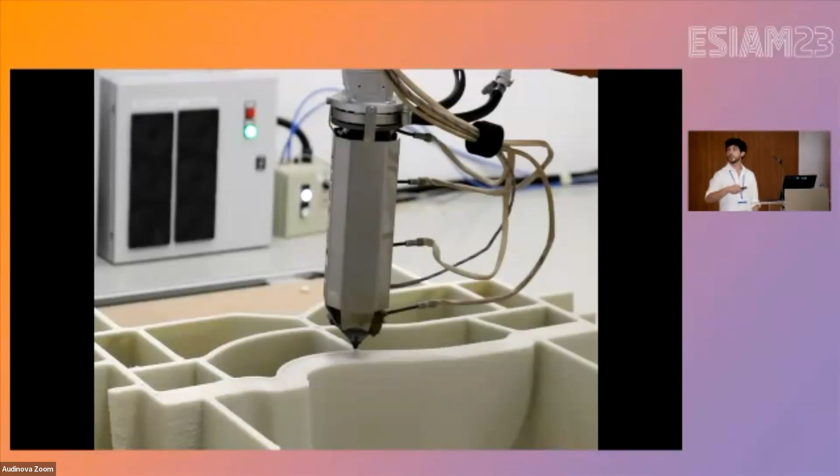What is FGF? This is a bit slow, but we have basically a robotic arm with an extruder, single screw extruder, as an effector. Doesn't start. Anyways, the movement is given by the 6-axis arm. Then the single screw extruder is able of processing polymers, so thermoplastics and thermoplastic composites, so polymer matrix with glass fiber or carbon fiber inside.

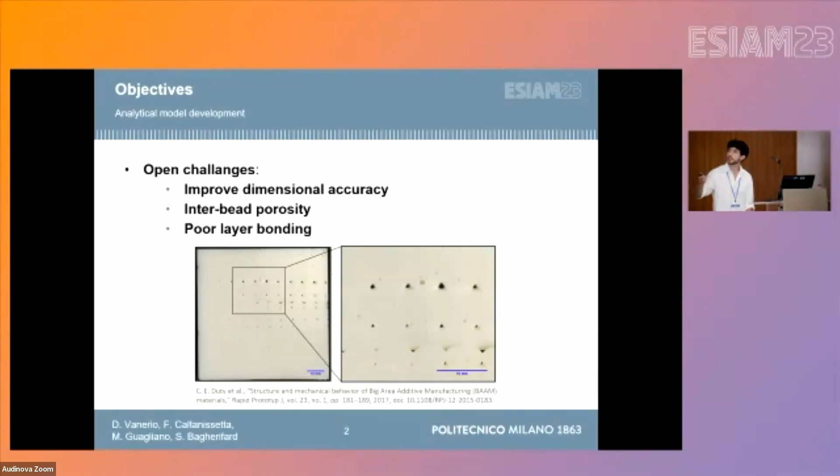The objective of this study is to face some of the open challenges for this technology, which are the improvement of the dimensional accuracy and, even more important, the reduction of the interbead porosity and the increase in layer bonding, so avoid poor layer bonding. In the image, you see some typical interlayer porosity.

So one of the main causes of all of these issues is the imprecise prediction of the bead width. Hence, the aim of this study is to develop a model which is able to precisely predict the width of the single bead. Here below you see a small animation. So at first we have the 2 beads with a gap inside. This would create interbead porosity.

If we make them closer, also the animation has some problems. So if we make them closer, we first have an optimal condition in which they are superimposed with no excess material. And then if they get too close, we have some excess material, which translates into poor quality of the printing and even failure, or in some cases, other type of interbead porosity.

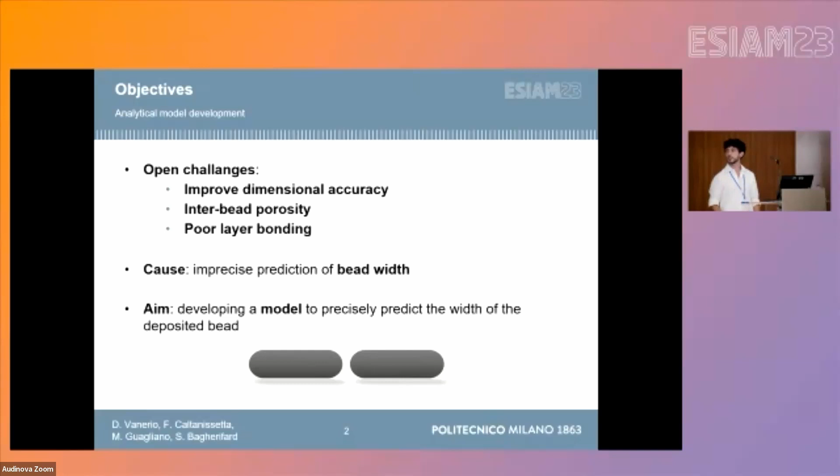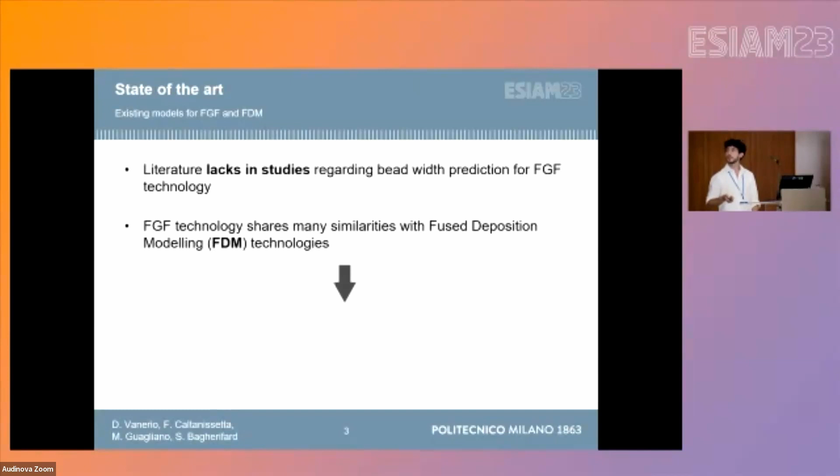So we started from the state of the art. We noticed that there's a lack in studies regarding the bead width prediction for FGF technology. While there are some studies regarding this topic in FDM, and FDM shares many similarities, many characteristics with FGF. So we asked ourselves, could FDM models be adapted to FGF?

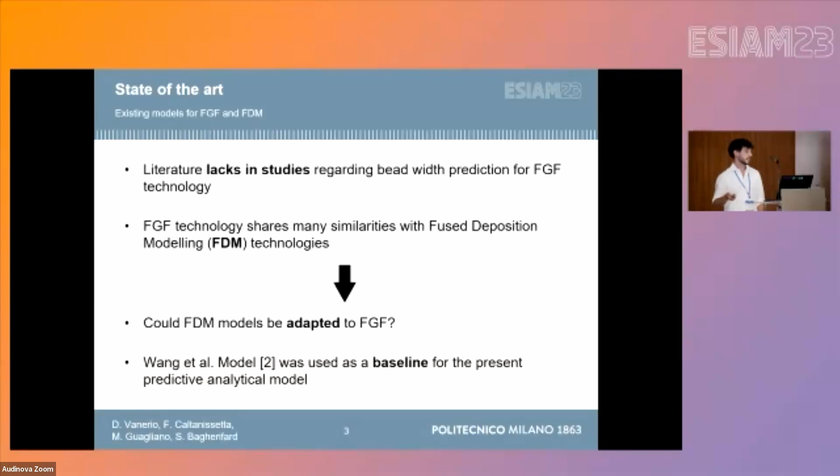And we selected Wang et al. model, which was then used as a baseline for the development of the model presented in the slides. We can start with the parameter definition. So we have this simple geometrical formula for the width. The geometry is basically a rectangle with 2 semicircles at the extremities. In the formula, you see the bead width, the layer height, and the bead cross section.

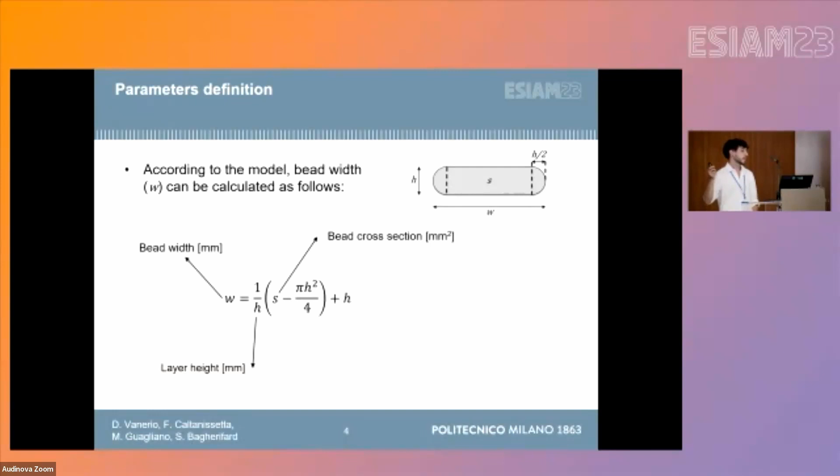The bead cross-section can be calculated as the ratio between the volumetric throughput and the traverse speed, in this case, of the robot. It can be also calculated as the product of the width for the height for a correction factor, which is a factor which corrects according to the semicircular shape at the extremities.

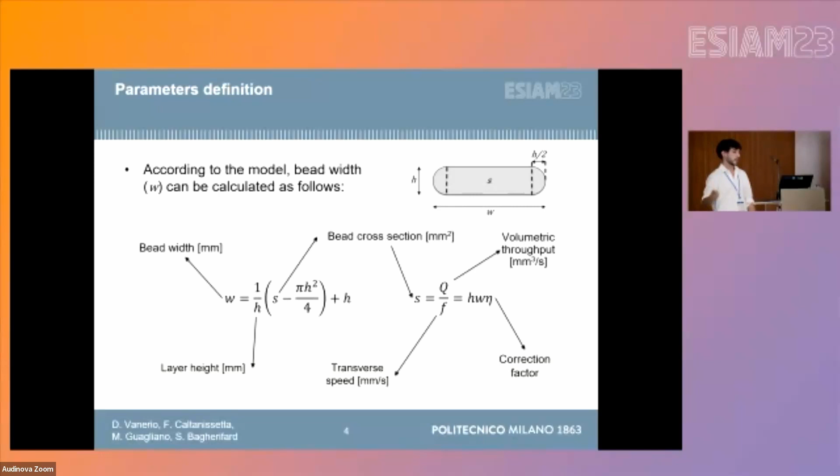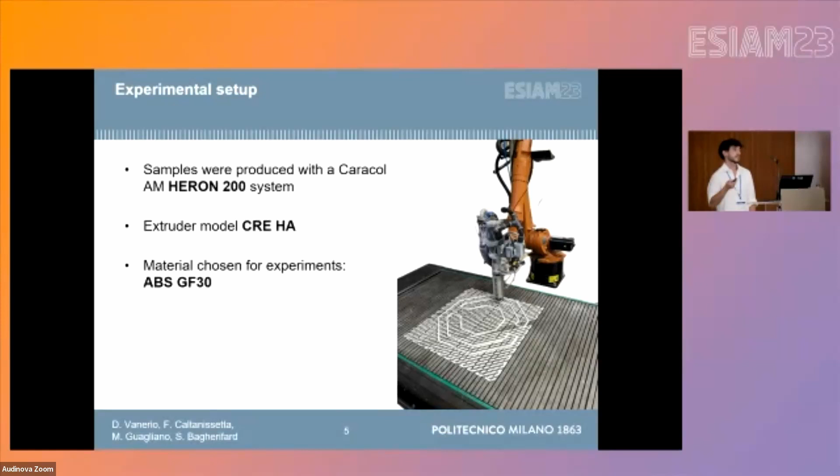From this, we pass to the experimental setup. The setup is, as I said, a robotic arm with an extruder at the end. We chose as a material for the experiment ABS with 30% glass fiber, because it is a commodity material we use very often for many applications.

This is the design of experiments. We started by investigating the throughput and regulating the throughput. We analyzed 10 different levels. For each level, we have 6 repetitions in measurement of the throughput. For each of these repetitions, the extruder and the robot were in a fixed position, so it was not a printing condition.

Then, for the model validation, we have some parameters which we varied with 3 levels. These parameters are the volumetric throughput, the travel speed as defined before, and the layer height. We made all the possible combinations, reaching 27 different combinations. For each combination, we performed 10 different measurements, so we reach a total of 270 measurements.

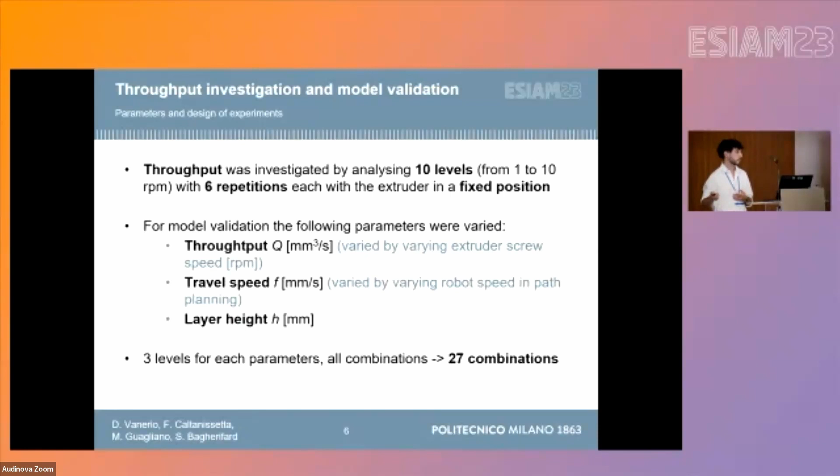The printing model is the one in the picture. So for all tests, the same geometry was printed. It was just 3 different tests. And the different colored areas show you the different traverse speed of the robot. So the light blue is 40 millimeters per second, the black one is 50, and the gray white one is 60.

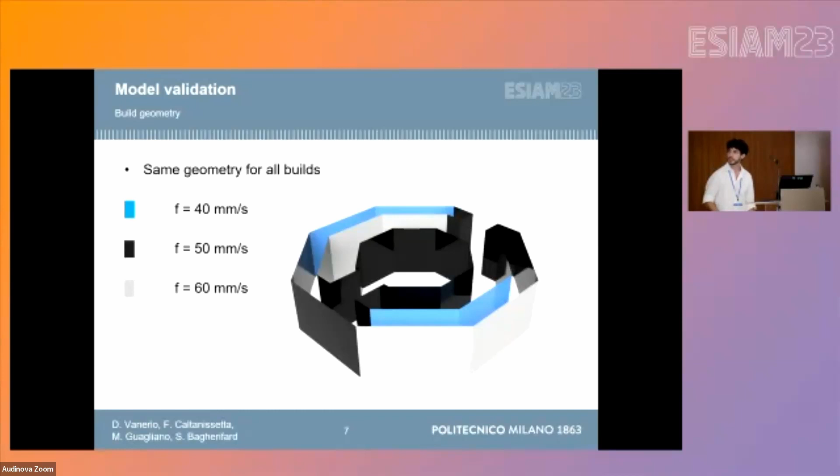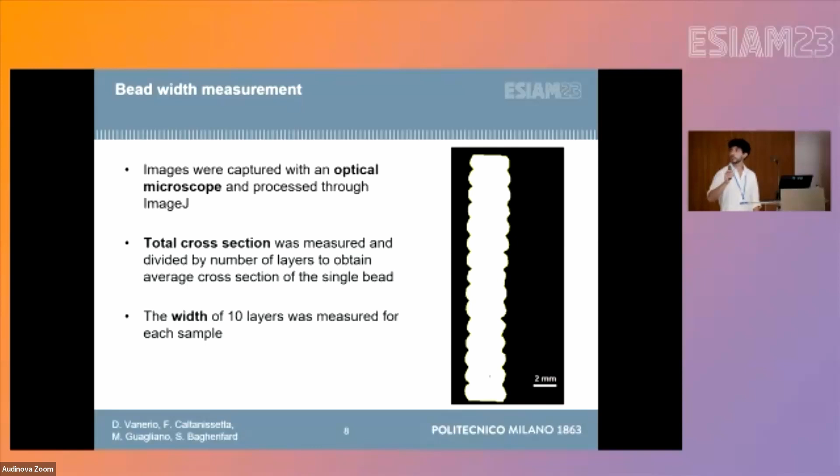From this, we went to the image analysis. We used a classical optical microscope. We first calculated the total cross-section of the sample, and then we calculated the cross-section of the single bead by simply dividing the total cross-section by the number of layers. And then we took 10 measurements for each sample for the width of each single bead.

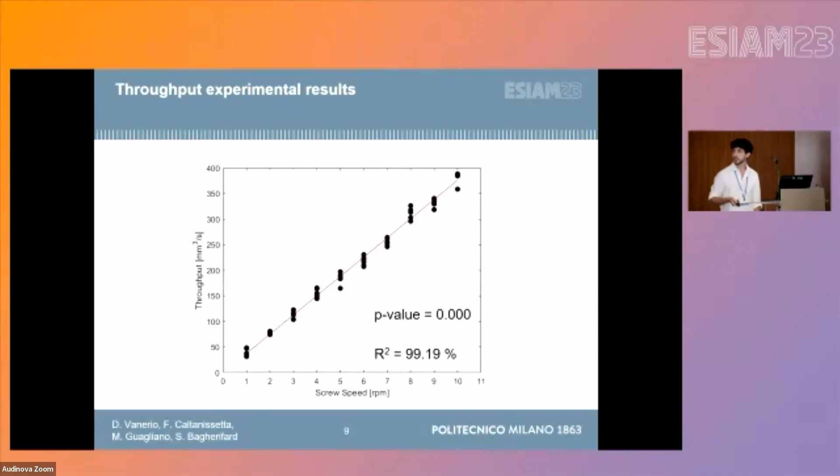So first results for the experimental phase are the ones regarding the throughput. We obtained a pretty good law, pretty simple. We decided to do a linear regression with 0 intercept, because naturally when we have null screw speed, we also have 0 throughput. We found a p-value of 0 and an R-squared value of 99.19. So we consider this law basically validated.

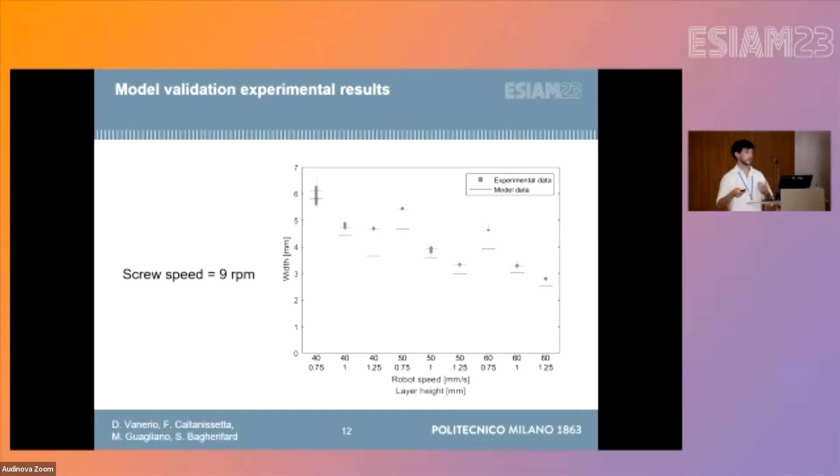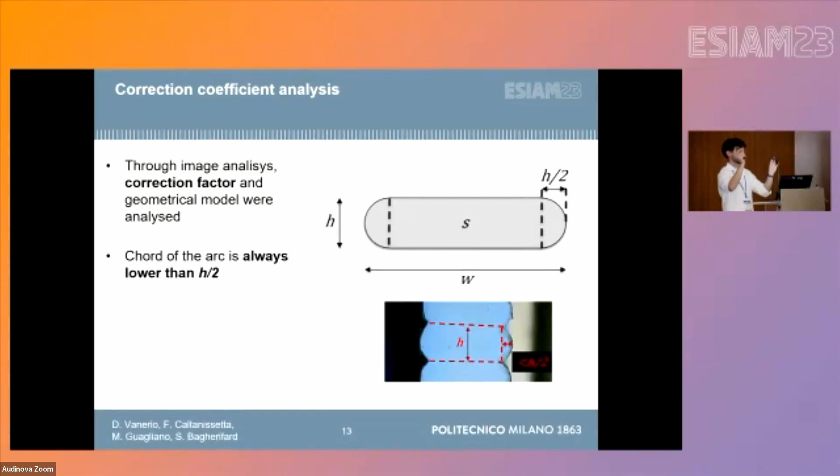After this, we considered the geometry itself, and we checked if the correction factor was actually correct also in our cases. We should have h divided by 2 as length of this circular part, but we noticed that in our case, the arc is never a semicircle, it is always smaller. So we always have a value of this length which is below h divided by 2.

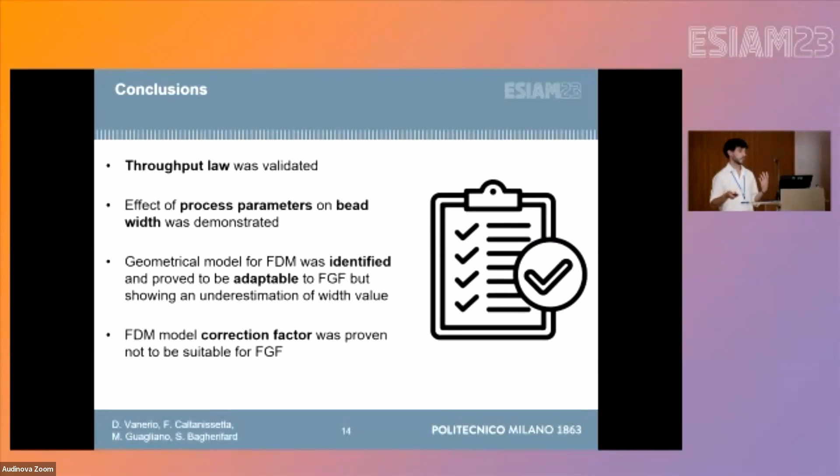So to conclude, we first of all obtained and validated a model for the throughput law. Then we analyzed the effect of the process parameters on the bead width, which were as expected, and we identified the geometrical model for FDM, which can be adapted to FGF, but at the moment we have an underestimation of the throughput value, or we have something in the geometrical model which makes the expected width smaller than the experimental one. So we have to find a more appropriate correction factor, because the one for FDM was proven not to be suitable for FGF.

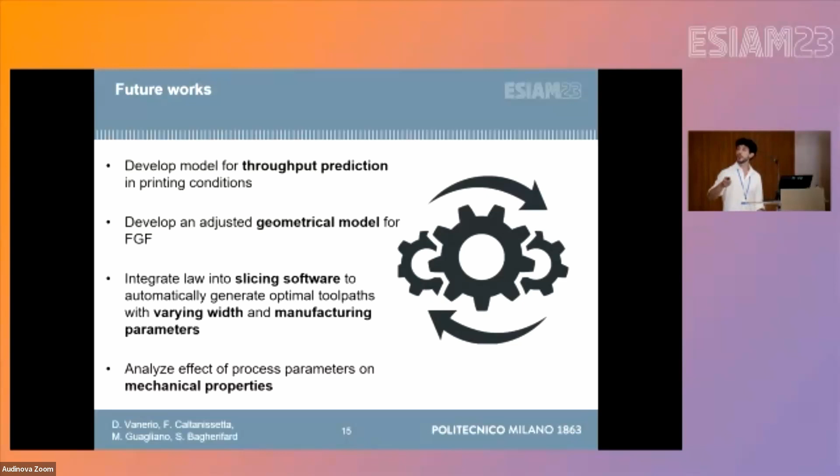As next steps, we will first develop a model for the throughput prediction also in printing conditions, so not with fixed extruders, but while we print. We will also develop and adjust the geometrical model with a new geometry and a new correction factor. Once we have validated a new law, we will integrate it into our slicing software, which will be able to automatically generate optimal toolpaths with varying width and varying manufacturing parameters. And last, we will analyze the effect of these process parameters on the main mechanical properties of the material.